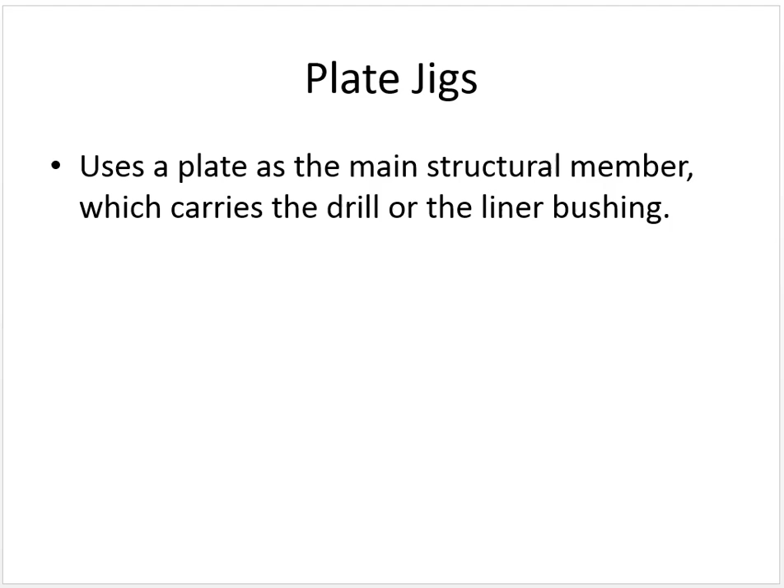The first one here is the plate jig. A plate jig uses a plate as the main structural member which carries the drill or the liner bushing. We'll have some examples on the next slide.

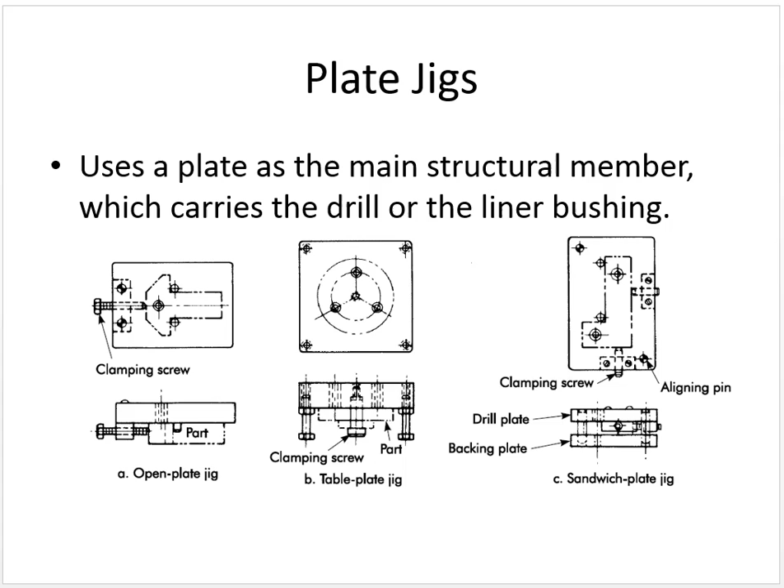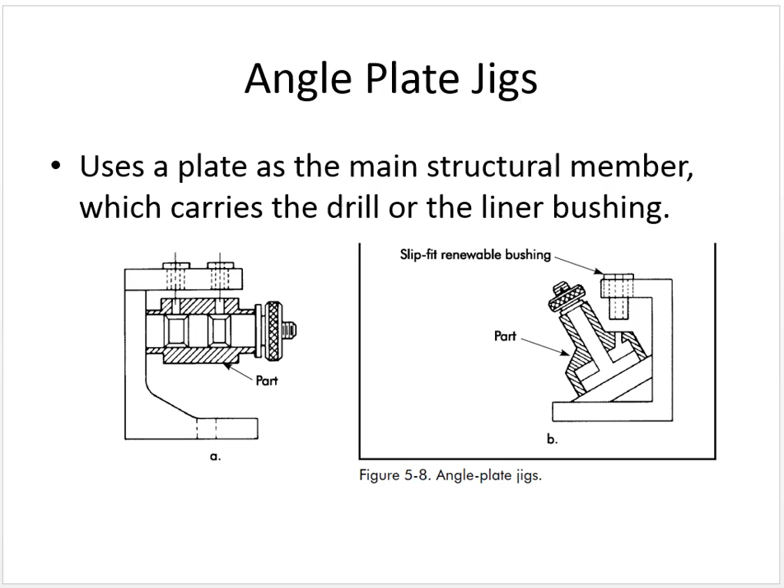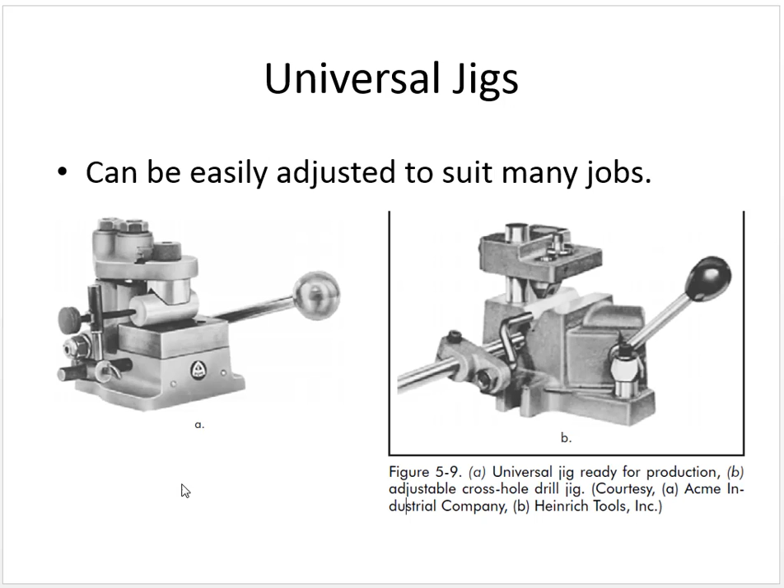In this case, on this other one, we have a V block surface for a cylindrical part. We have a stop here, and a clamp that holds it down. And then there's a base on both of these. So that's a universal jig.

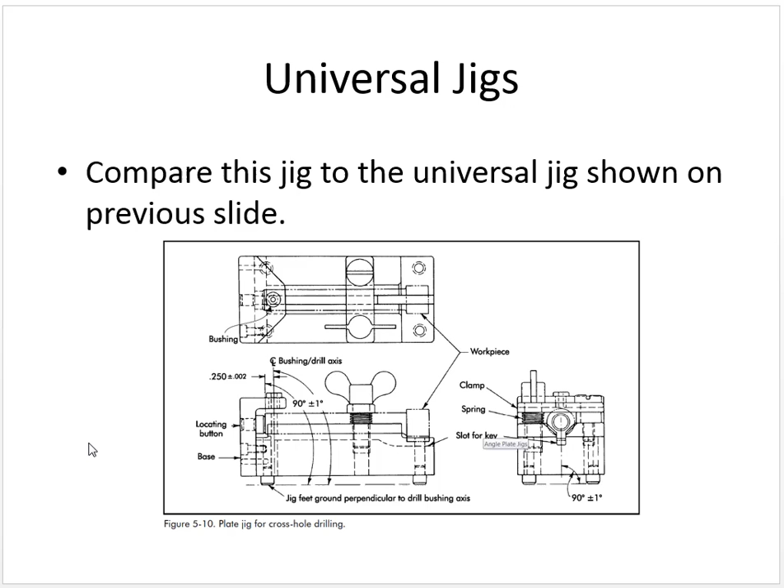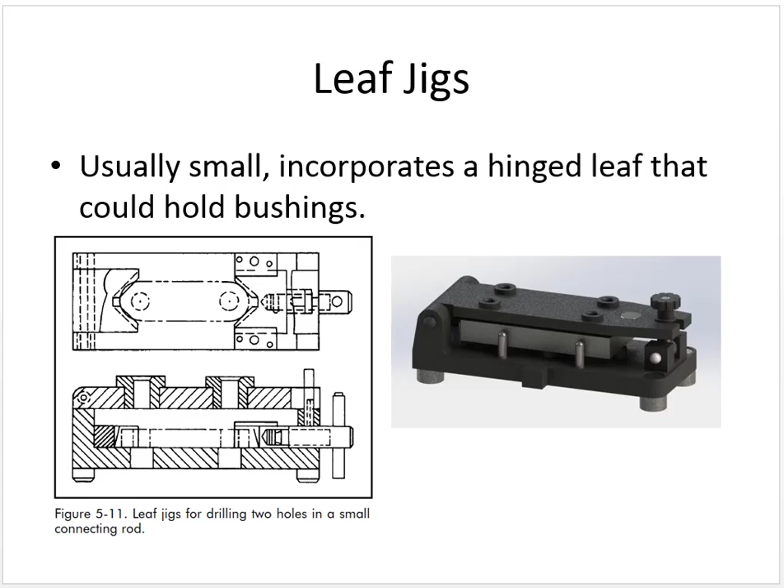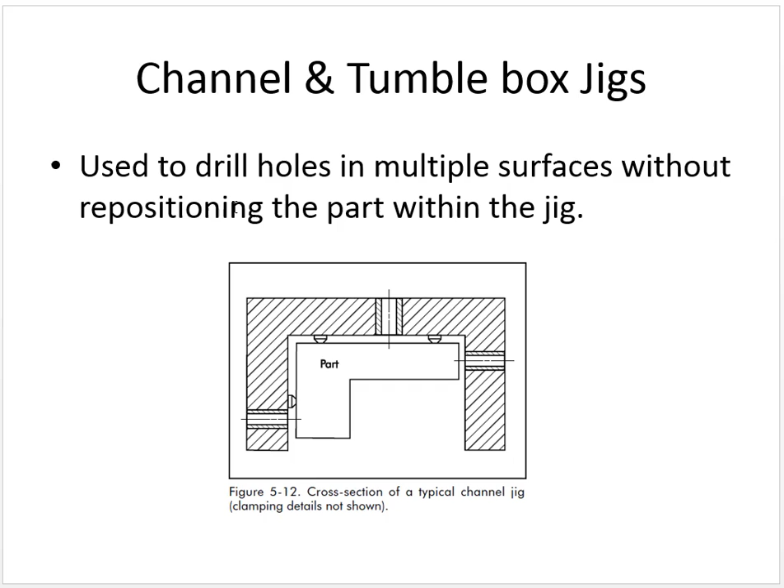Tumble box jig. This one is used where you have multiple surfaces that need operations on, so used to drill holes in multiple surfaces without repositioning the part. It's a beautiful thing to lock the part in place and be able to get the holes drilled on all three surfaces of this part without having to move it.